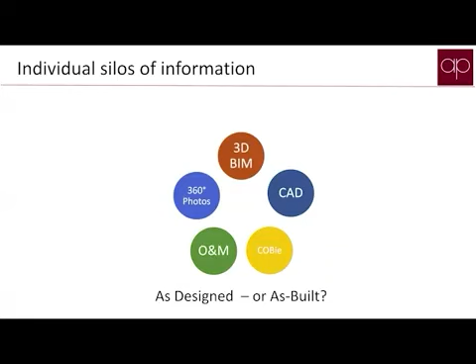So what's new about what we're offering? Well, what we're finding is that what typically is happening with the mandates - we've had the mandates in Britain as well for the last 10 to 15 years - the challenge is that we're getting really good BIM data that includes CAD, COBie data, O&M information, and also increasingly 360 photographs, but they're not connected. In many cases, they're not connected, which means that it's very difficult to check and process them.

And the result of that is that we need to pull things out and create an ecosystem, to remove the silos that we're currently creating, make sure that information can be easily integrated, that we can federate information. That means that, if it's machine readable, it can be automatically audited and also later connected in ways that the design team wouldn't have thought that asset management needs to connect things. So what we're doing overall is making things more searchable, more findable.

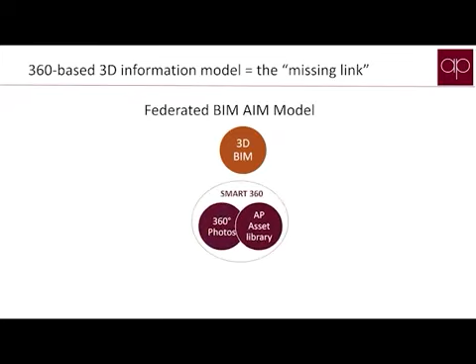And the mechanism that we use is that we'll take BIM models. If the information's in the BIM models, fantastic - we extract it into an asset database progressively, which I'll show you in a second. But we can also take information that wasn't in the BIM models, maybe from schedules, and importantly, from 360 photographs. We can turn 360 photographs into some intelligence that makes it a lot easier for people to maintain the information. And what that does is really bring together the 3D model and also records what was actually installed, because the 360 photographs then become that record of what was actually installed, by creating them into practical and affordable as-built models.

Now, as far as ActivePlan is concerned, we've got lots of clients who are large building owners. We've also got a lot of facilities management companies as clients. We've got construction companies, and we've got a lot of technology partners as well. And what we're doing really here this morning is talking about how we do this rather than why we do it. So one of the things that we want to do going forward is understand why we're actually doing things.

But the focus of this today is to share with you the technology that we've built that we'd like to have partners to work with on it. We've got tools to create machine readable asset information requirements and also manufacturer's product library data. We can then automatically validate that information and produce project and asset information models. And we've also got tools to coordinate procedures - maintenance procedures, installation procedures - and the digital asset capture enables us to pull information together so that help desks can have a much better record of what's been installed in the buildings.

Within ActivePlan, we've got deep expertise in BIM. We've been doing it now for literally 40 years. And we've also, though, unusually got a lot of experience in asset management, same sort of time period. More recently, over the last 5 years or so, we've built a lot of knowledge of reality capture, and we've got some great partnerships with companies like OpenSpace and the like. And because of that, we've got expert partners and software firms. You can see here some of the companies that we're working with who are contributing to the whole joined up golden thread process.

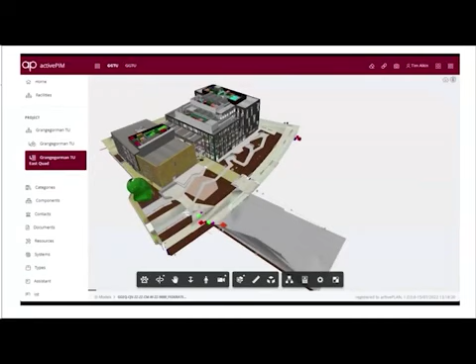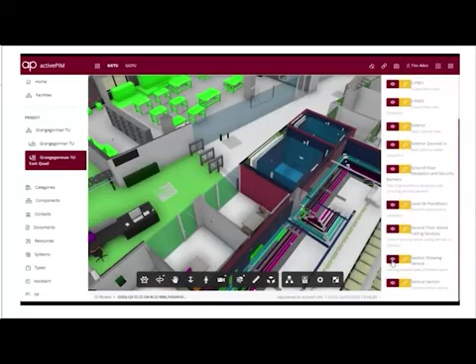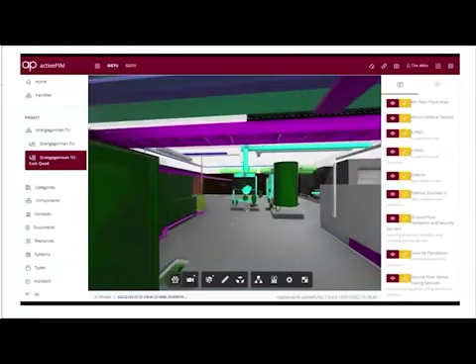This is an example from a university in Dublin, showing our integration with the Autodesk platform. The important thing is this is within our asset information model, so data about the assets can be held in the models, but it doesn't need to be. In this case, information on the pressurization unit is in a SQL database in the cloud, so manufacturers and maintenance teams can access it without learning Revit - for example, on this pump, with information coming from a product library.

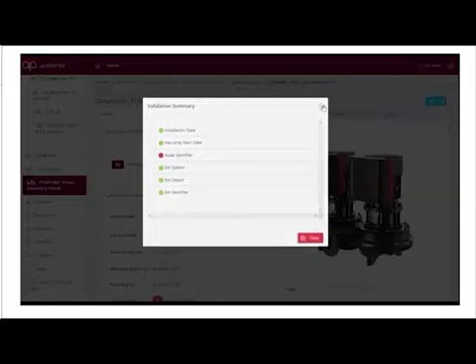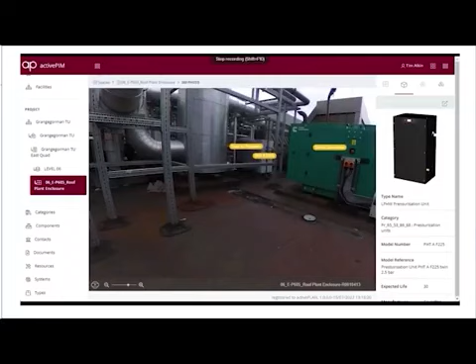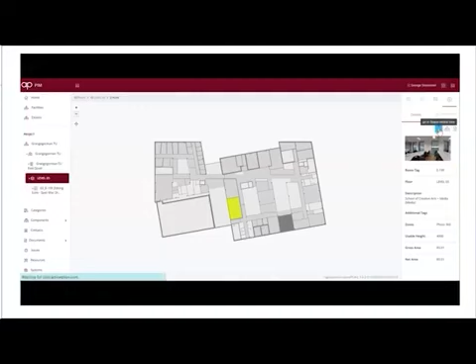The unique thing we've done is integrate the 360 photograph, so it represents what was actually installed rather than what was planned. This is a much cheaper and more cost-effective way of capturing real information. The important thing is those tags aren't in the 360 photo - they're in the database. So all the information and classification can be glued together in the asset database, coming through, in this case, from COBie.

Here we've got data from the COBie outputs - rich information populated from manufacturer's product data, all glued together automatically because of the COBie schema. The standards David talked about earlier, as long as people follow those, let us glue things together automatically. Here we're interacting with the 360 photo - you've got the database on the right of what should be in that room, and as we tag them, it turns green.

We can also use this to identify things that weren't in the models. In this particular college, the schools probably bought furniture separately, so they want to use the 360 photograph and asset data to do the tagging, creating an asset list.

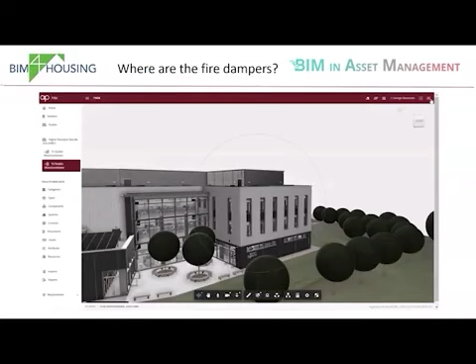Here's another example. We've got a range of software applications - Open Space, the Autodesk suite, the planned maintenance software - but we're asking a simple question: where are the fire dampers? We've made it so this is all easily glued together and searchable, connected back to the manufacturer's product data through a product library. That information is collected once and put in the product library, so any other location where that fire damper has been used has that data.

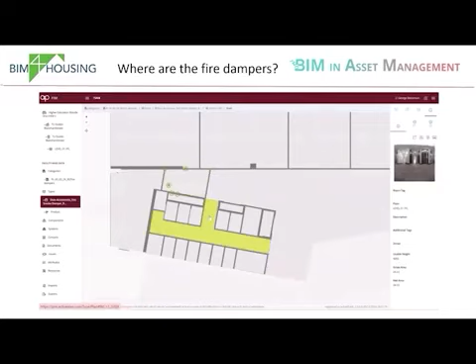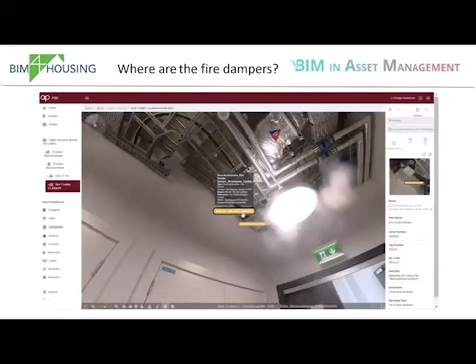Here we're looking at the simple interactive plan. We can find things in a 3D model, but FM managers often prefer a simple view like this. What we've also done, which is really clever, is tie it back to Open Space and the 360 photos. So when you click on that asset in the schedule, it takes you to the 360 photo and zooms automatically to where that item is in the building.

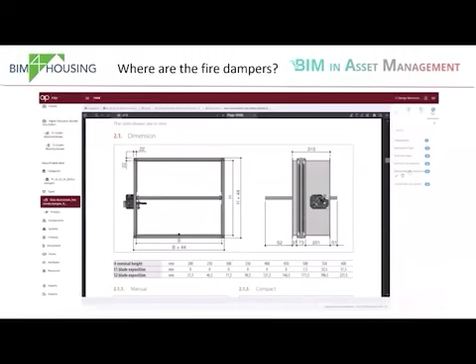That makes it easy to also tag it back to documents - the certificates of compliance, and the operating and maintenance information, can be tied back to the asset, the system, and the space. We've also made it so that can be tied back to which locations that same fire damper has been installed in, which buildings, and also tied back to SFG 20, the UK maintenance standards. All of this is glued together so the information is easily kept up to date by whichever software is being used.

So what do we do about things that aren't modeled?

The ideal process of BIM is that we should be building a digital model that then goes through into construction. But the reality is that information isn't being provided in a machine readable format. It's in the form of information in documents, and we end up with a data gap. The only option then is to do a manual survey, sending people to site to find out what was actually installed, and that can easily cost £100,000.

So we've got FM clients who have to commission those surveys, and they need the baseline information to understand what they've got to maintain. How can we address that? How can we learn from what Reality Capture is doing in the commercial sense?

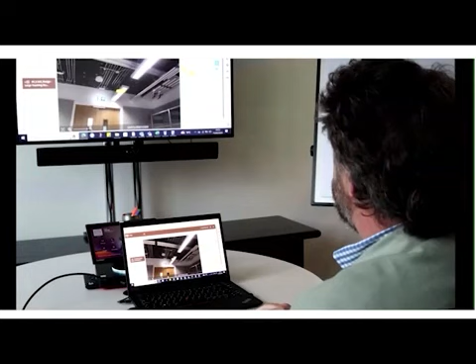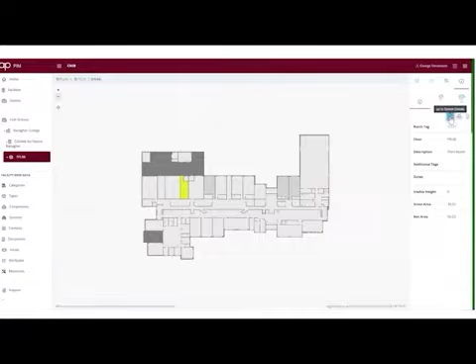The important thing is that back in the office, subject matter experts can access that without having to go to site and actually do the asset tagging. Those tags are being brought through from the asset database. So here you're looking at Active Plan, and we've got the 360 photos. We've also got all the assets that have been tagged by subject matter experts who could be anywhere in the world - we're looking for people perhaps in Hong Kong that can recognize assets and do some of this tagging.

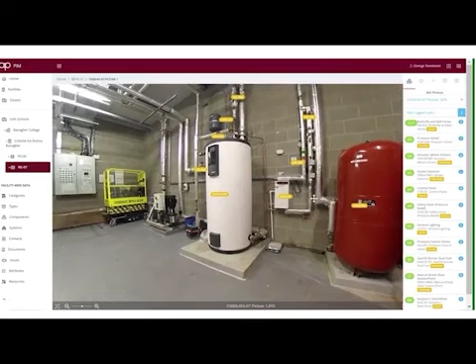This is a great way for us to bring together the expertise that you have in Hong Kong and also in the UK, and that's part of what we're trying to do with the task force.

What we're also able to do is tie that particular pump, for example, back again to maintenance information. So this is used to populate IBM Maximo, their main system. All of the information here is then coordinated from BIM to asset database to planned and preventative maintenance.

So digital asset capture, what they've found is that it's 600% more productive, which is quite a staggering figure. That means that rather than normally being able to do 160 assets a day, they're actually doing 1,000 a day. What they can also do, once they've got that information from a capture perspective, is use it to validate what's been provided, what they've been told they've got to maintain.

And Atkins are now applying it for condition assessments and risk assessments. The beauty of this is that we're providing a platform to teach new people, and also AI. This is part of what we're doing in Activeplan - we've done now 150,000 assets, and that's giving us good training material to be able to recognize that valve, for example.

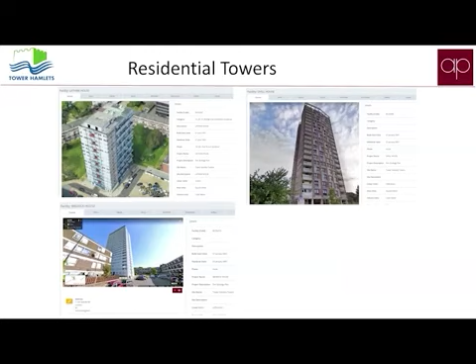Right, how can we do things with existing information? This is a large project we've got on in London at the moment. Tower Hamlets is a large London borough, and they've got 78 high-risk residential buildings. What we did was use something simple initially - just take a spreadsheet of all their properties, read it into the Activeplan database, and that created for us data containers for each of those properties.

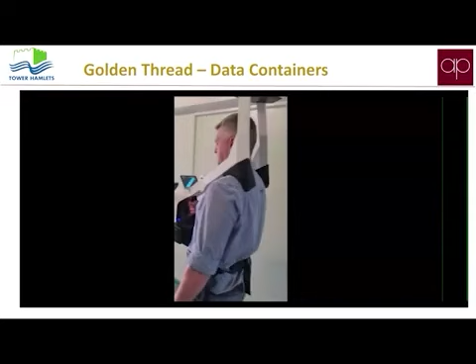This is simple stuff, but very effective. What we also did was commission surveyors to go and use LiDAR - in this case a NavVis camera - to create the spatial models, and those spatial models also include 360 photos.

And the team, again, don't need to go to site to do that asset capture. They can identify where all the fire doors are, where all the safety critical measures are, the emergency lighting. They can also look at where the lifts are, etc. All of this is connected back to the master database - systems or assets mentioned in the safety case report can be connected.

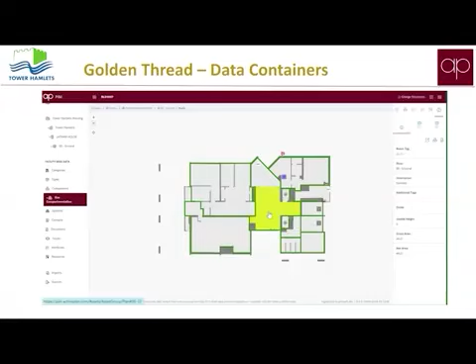So here we've got the spatial model, and the spaces themselves and the measures that are in there are actually located automatically from the CAD data. But a lot of this information may not have been added.

So the specialists are able to go through and say what type of lift that is. And as they're tagging, it's actually creating, as I was showing you earlier, the asset database, which again is a two-way connection between the schedule of all the assets and where it is. So if we want to see where that particular smoke detector is, by clicking on the schedule, it zooms to the 360 photo.

This is how smart 360 photos can be made. Here we've got a smoke vent, and we want to record what type of actuators are on it, so that's added. We can see there's a smoke detector there. So imagine how much more time effective this is to pull together information. There we've got a dry riser, which the emergency services will want to know about. We can go back to the schedule and the emergency services can say, where is that dry riser on the 4th floor? And it zooms to it, so their planning becomes much easier.

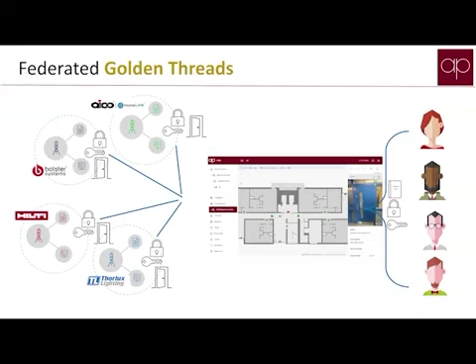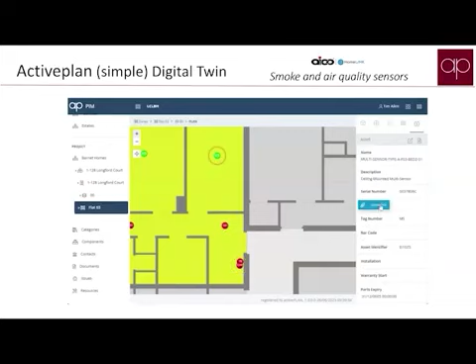Another way of using the spatial model is to pull together information captured for different purposes. In this case, we've got sensors in the building tracking temperature and humidity, and we're tapping in using an API into their source of information. This is bringing it into the context of the spatial model, reading that information live from the sensor, and also bringing it back to the asset information model.

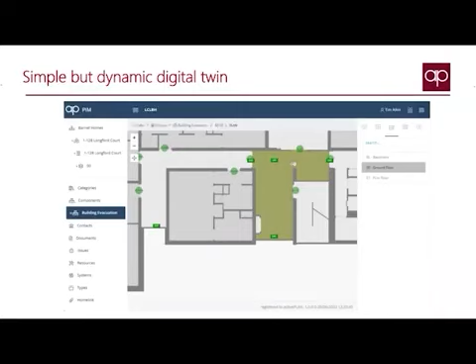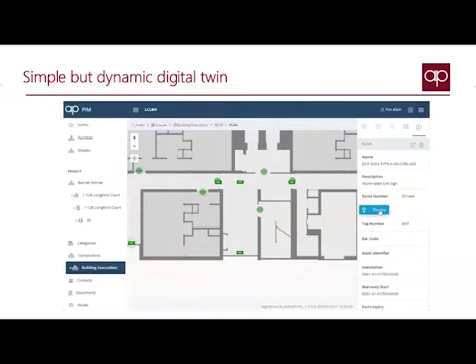This asset information model is a SQL database with all of the endpoints and connections that tie everything together. Here we've got information about the fire doors and the emergency lighting, and in this simple example, whether the batteries need replacing. Findability is something we're trying to encourage.

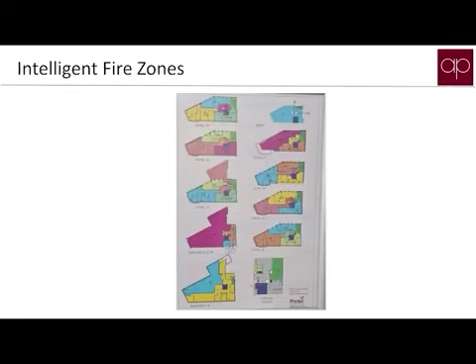So here, for example, in this building we've got some fire zones. We've now represented those fire zones in the Active Plan asset information model. We've got intelligent spaces - these are the data containers I was talking about earlier - but they can be grouped and organized in accordance with the fire zones. This means you can very easily see which spaces are being protected by which fire alarm system.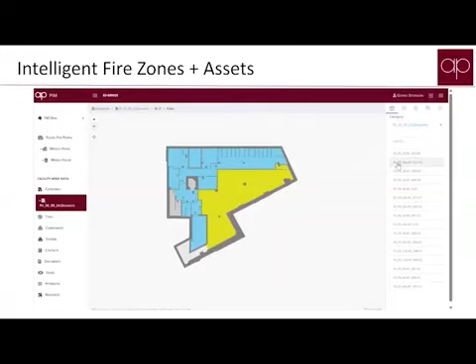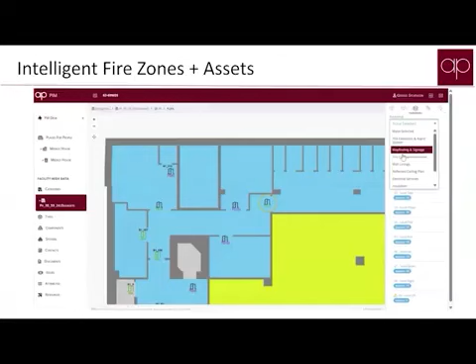What we can also do, and this is really simple but very effective, is turn on drawings. You can put drawings on as backdrops and move between them. It's not as clever as having it all in the BIM models, which we can also read - the BIM models are part of Active Plan - but this is a simple way of doing things just with existing drawings. Here we're seeing which spaces are maybe dangerous from a fire perspective, what doors they're protected with, whether it's a 60-minute door or a 120-minute door, and we can see it in the context of the backdrop drawings.

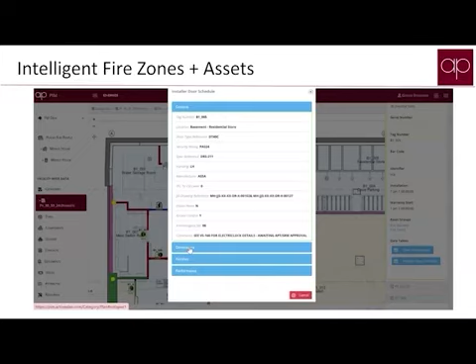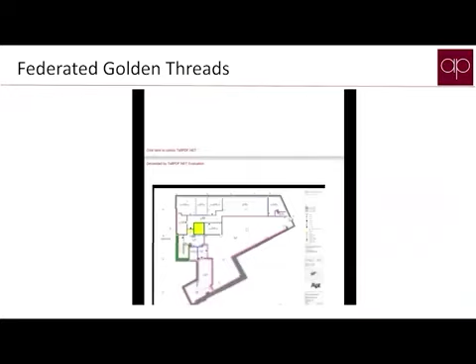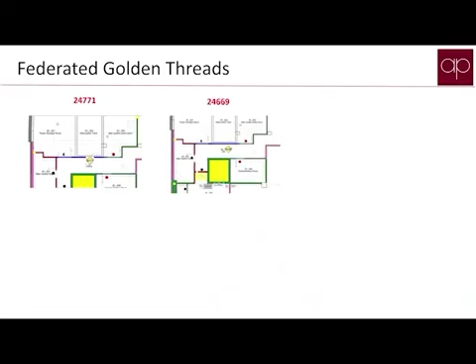We can also connect in the detail that the installer collected as they carried out the work. In this case, we're reading information recorded by a fire stopping contractor. They're using a simple application for recording what they've installed, putting a pin down on an image of the floor plan. In theory that's great, but the problem is, if you want to know what fire stopping has been installed in a corridor, you've got to open up 10 or 15 drawings to see it.

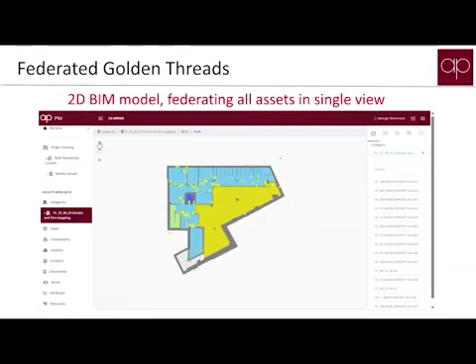Now, by reading the information, Active Plan can read the locations of those pins on the drawing. We create COBie data from the PDF reports, and that means we end up with an interactive model. So here we've got where all the fire stopping is. Remember, this information hasn't been modeled - it's come from just a PDF report that we did some data engineering on, not AI, just simple data engineering to pull this information together.

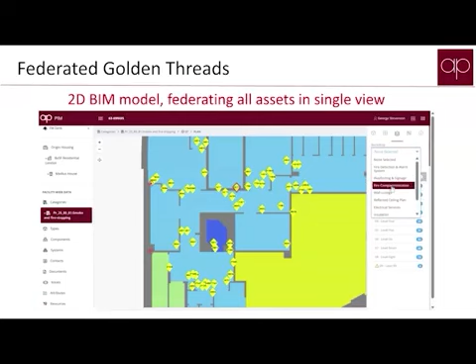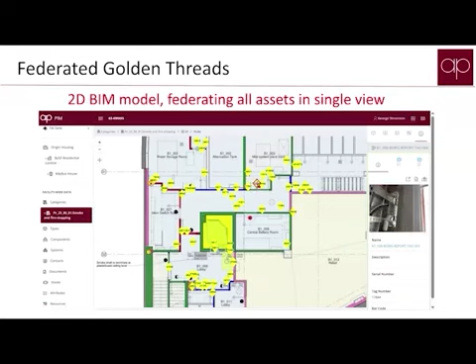But now we've got something that is a fully coordinated set of rich asset data collected by installation contractors, which can then be used by the FM team. It's a matter of looking at this as an ecosystem of different information that can be used, reused, and kept up to date. Because it's in SQL, it's very easy to tie back to other applications that people may be using. What we're doing here is taking 360 photos and asset data, bringing them together, and ending up with smart 360s that tie back to all the great stuff David was showing earlier, which the teams will use. Also, we're not bothered what type of camera is used.

It may be a low cost 360 camera, or it might be something really clever like the Leica or NavVis cameras. We've also got partnerships with OpenSpace, Multivista, Hexagon, and other organizations where this information is typically captured for construction purposes, but we can reuse it. We can use it for validating information.

There's a whole range of different ways you can imagine navigating your O&M information through 360 photos. What we're doing is transforming record information from something that's dumb to something that's smart, from passive to active, from something a human needs to read and interpret to something that's machine actionable. It's really the building blocks for AI.

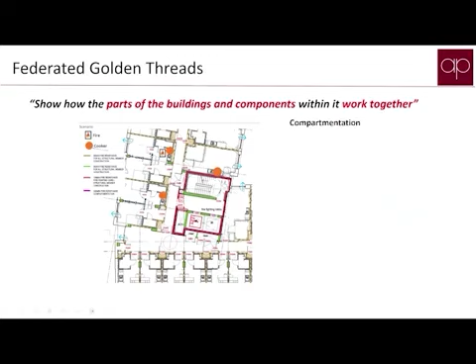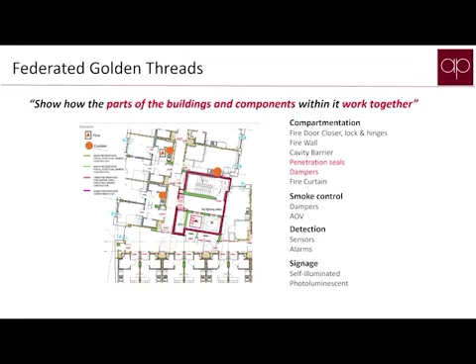Well, the main thing is having good compartmentation. The fire doors may be perfect, but we've got to make sure all the other measures that make up the fire compartment are actually sound, and the same with smoke control and detection systems. This is what we call the golden thread, making sure everything that should work is actually in place and working.

When you're doing inspections, you need to look at things not simply as to whether that fire door is a good fire door. You have to look at what it's actually doing. So that door there is, again, protecting a stairwell.

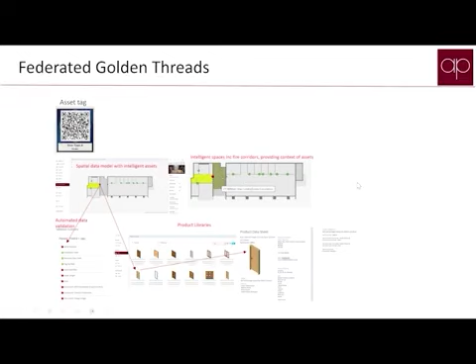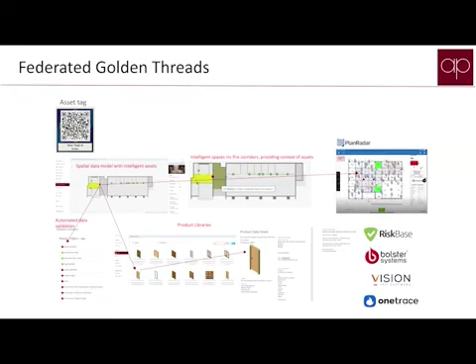When other software is used by different teams doing inspections, we want to make sure this is all federated and glued together. So with the task force, we've brought together software providers, surveyors, and people with expertise, and they can work together to come up with solutions that actually work and are tested.

We then bring in client organizations who understand or need that particular solution. By bringing them together, we can end up with something that's tested and works, and then we can use that again with good classification and standardization. We can pull these together to demonstrate something that actually works, not a broken down thing.